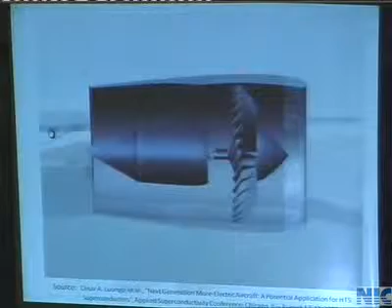Conventional electrical generators are huge in size. So the only way to get rid of this weight issue is you need to go for high temperature or cryogenically cooled electric motors, as well as cryogenically cooled superconductor generators.

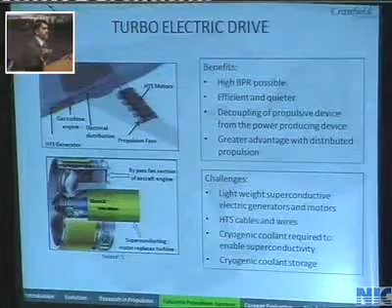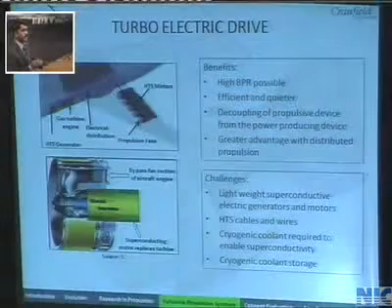When you need to cool it, the problem starts with the turboelectric system, because you need to carry a cryogen on board. If you remember the cryoplane project, the biggest challenge was, though hydrogen burns very conveniently with the gas turbine, the biggest problem is how we are going to carry it on board. That's the problem, that's a big question. If scientists, you and me, researchers, are able to address this problem, then turboelectric should be a good solution looking forward.

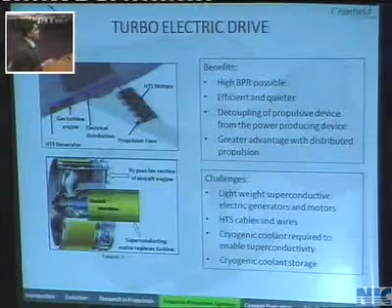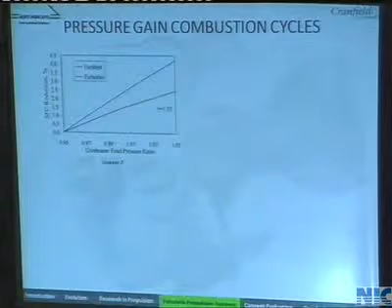And the final one is the pressure gain combustion cycle. What is a pressure gain cycle? In combustion, generally a gas turbine is a continuous flow engine, and you find a certain loss in terms of pressure drop. There will be a pressure drop in combustion, but if you are able to gain the pressure in the combustion chamber, you have a better SFC.

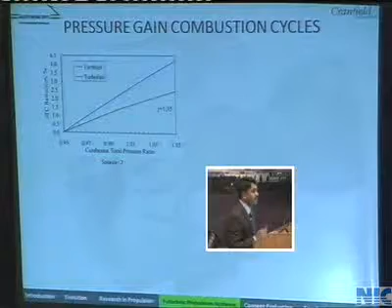But how is it possible, given that the gas turbine is a continuous flow? It's just a device which can give you an increase in pressure. It's called a wave rotor. The wave rotor is connected at one end to the compressor exit and the other end to the combustion inlet.

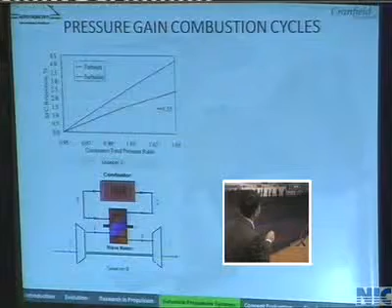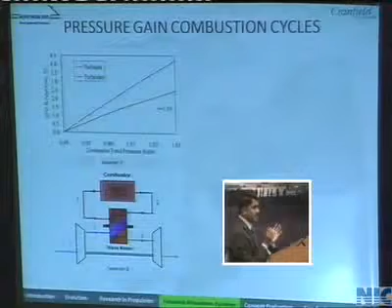So what happens is the cold air enters into the wave rotor and goes to the combustion chamber, and when the air enters, the wave rotor is closed, so there is no flow continuously going in. So it stops the flow, and it's kind of constant volume combustion happening in that place. That in turn increases the pressure ratio, and because of that increase in pressure ratio, your SFC is also improving.

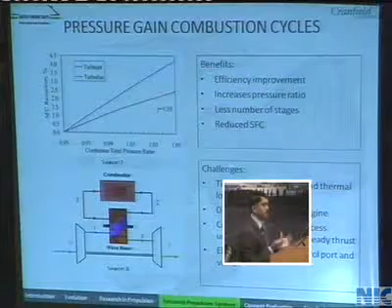But the drawback is the timing valve. How are you going to control the valves and the thermal loads? The control valve process is very tough. That's the main challenge, and electronic timers to control these ports are again a big challenge.

Open rotors and turboelectric things - open rotor has been investigated during the 1970s and 1980s, but we are trying to address it again. We are trying to bring it back because it has enormous benefits. With present technology, we are trying to see whether it's possible to reduce the noise, and whether it's possible to integrate the engine into the airframe in some convenient way.

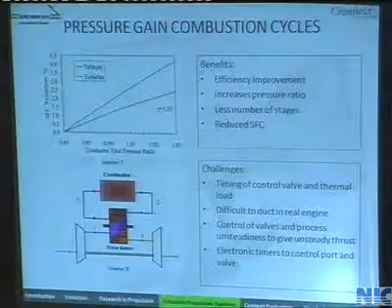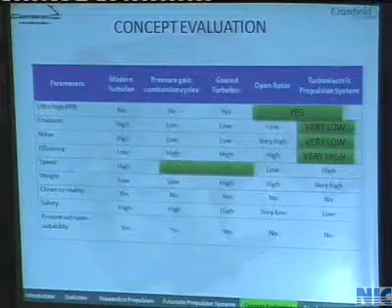So I tried to evaluate all these 4 different concepts. I laid down different parameters which are generally crucial from an engine point of view: ultra bypass ratios, emission, noise, efficiency. Because of global warming, we are always looking at these parameters: emission, noise, efficiency.

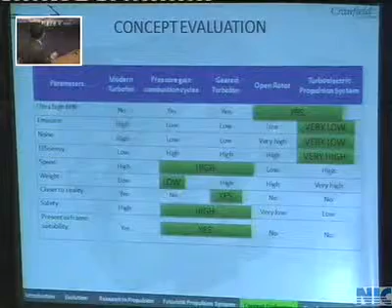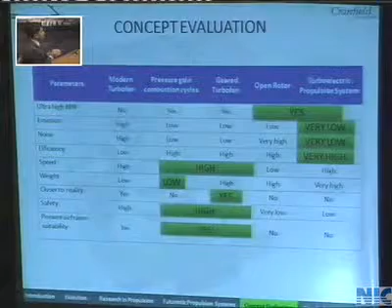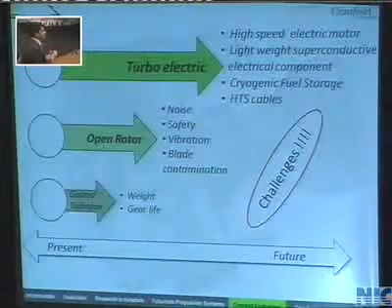When you compare these engines with the baseline modern gas turbine turbofan engines, the turboelectric propulsion system seems to be a pretty good solution. But when you see it with respect to time frame, feasibility, and certification issues, it seems like the geared turbofan could be the immediate game changer, but it doesn't meet the future needs. So we need to do something else.

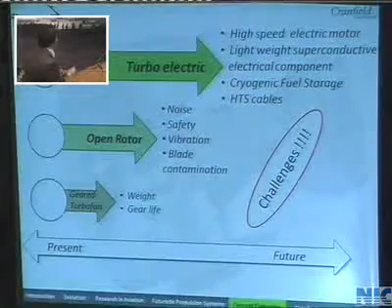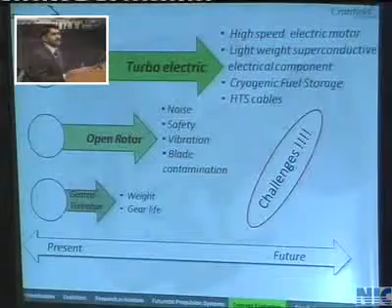It's not just the geared turbofan which is going to rule. So next, if you see the open rotor, it shows very good positive signs of being used in the future - only the challenges are here. But now there are several European Union projects going on, and some reports suggest some of these problems have been addressed, while some are still under research.

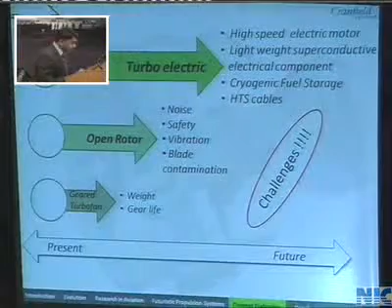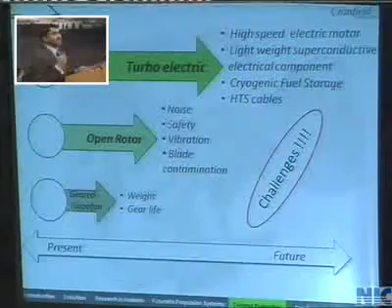In the long term, with respect to time frame, the turboelectric propulsion system seems to be the promising solution. It gives a promising solution only when these high temperature and high speed electric motors, generators, and cables are feasible.

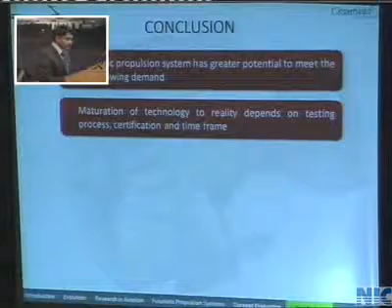To conclude my presentation, futuristic propulsion systems have greater potential to meet the ever-growing demands. Until and unless we go for a step change, it's very tough - we can't meet the future needs. The maturation of technology to reality depends on the testing process, certification, and the time frame it takes to mature.

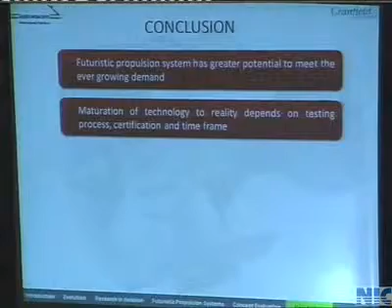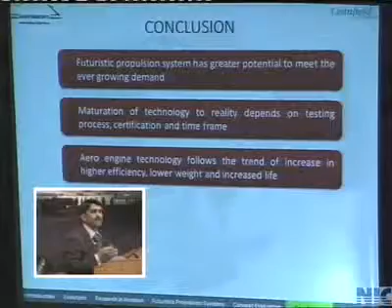Aero engine technology follows the same trend of increasing higher efficiency, lower weight, and increasing life throughout the past 70 years, and that trend is going to continue over the years as long as the aviation industry exists.